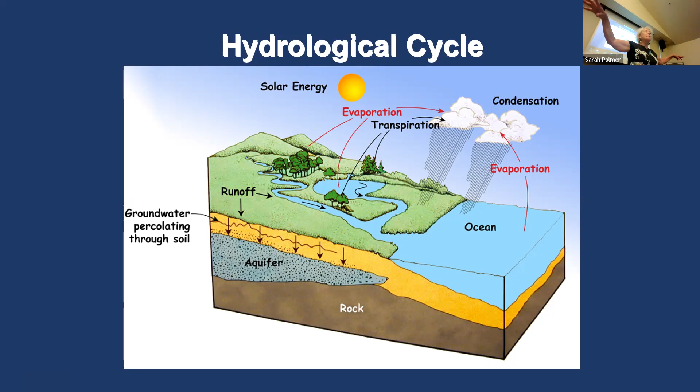An important thing to pay attention to is the aquifer, which is just a saturated part of the ground where water fills all the pore spaces. There are very few places in the world where it's one big basin - it's not an underground lake. There are some places in Florida and Mexico that's like that, but generally speaking, it's just saturated ground.

The infrastructure itself is old at this point. So what are some of our main challenges? We've got a number of challenges and risks, and one of the things you're going to find the most is climate change and unpredictable weather.

One speaker I heard, Hunter Lovins, called it climate weirding - we've got one extreme and the next extreme. With some of the models I've seen, the idea is that the far northwest is going to get wetter and wetter, the south and southwest is going to get drier and drier, and we here in the middle are going to be experiencing a little bit of both.

So sometimes a lot of wet and probably most of the time a lot of dry. I know that a lot of times we speak of ourselves as being in a drought. I think we have to change our thinking a little bit because we're not in a drought anymore, we're in a new reality. We are in a dry climate with occasional bits of wet. So that's just where we are.

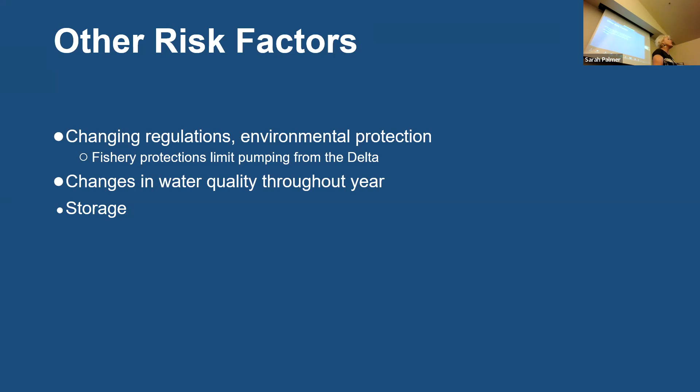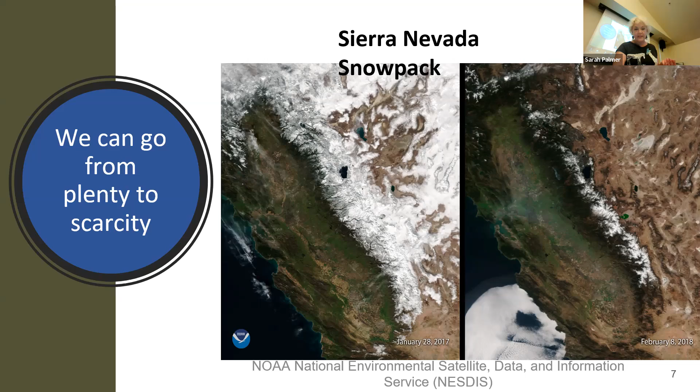And I was just up at Shasta on a water thing about a month ago. Shasta is right down where you can see some of the original structures they used to build the dam, so it's pretty shocking. And the boat ramp there, we had to walk down to get on this boat that was taking us on a tour of the dam.

It was a bunch of water people, and what happened was we had to walk way down this ramp. I looked up, and 140 feet above me was where we normally would have gotten on the boat. So you have this huge, what they call a bathtub ring around this thing.

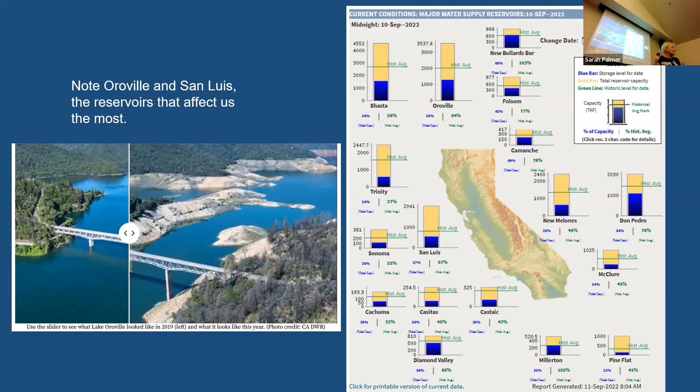I just put this up. This is available to anybody who wants to pull this up. They update it almost daily, and I pulled this up - this was from yesterday, midnight, September 10th. And these are the levels of the dams. The ones that most interest us would be Oroville and also San Luis Reservoir. You can see they're quite a bit below their historic averages.

Subsidence, obviously, the land is going to be coming down, and it is down in some places more than 30 feet from the levels that it used to be. And the reason is it's peat, and peat basically collapses.

And then we have sea level rise, which we're already seeing effects of, and then seismic risks, because some of these levees really, they're dirt filled. If you read a history of the Delta, what you sometimes see is that farmers were kind of saying, oh, well, you got a levee, watch my levee, it's bigger than your levee - this little thing where they were building these levees just to try and make sure they had the water and they could pump over. So seismic risk is a very real type of thing in terms of earthquakes. So all of this goes into the levees, which means the integrity of the delta is at risk altogether.

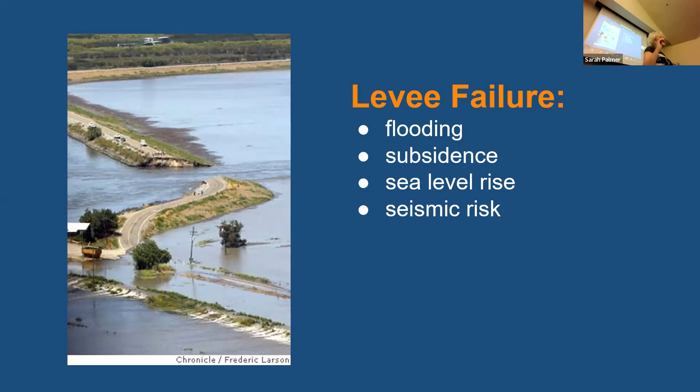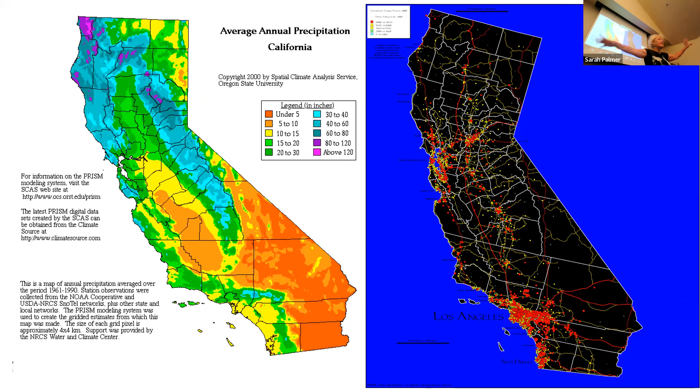Okay, so here's another thing, annual precipitation. This is kind of an older map, but it still shows the same picture - our annual precipitation, we get about 75% of our water falling in the north, and 75% or even more of our population is in the south. The red dots are population centers, and the bluish and purplish are where we get the most precipitation. Red is where you get the least - it's hotter, drier.

Okay, so we come up with a water portfolio. As you may be aware, we first had the WaterFix, which Jerry Brown said we had this WaterFix - we're going to put 2 tunnels through the delta, and we're gonna build this thing, and here's how we're going to manage the delta. And then Newsom came along and said, nope, we're not doing it that way. We're going to do a single tunnel, and we're going to have a water portfolio.

And a water portfolio means that you look at a lot of different types of things. When you're dealing with a water portfolio, one of the things which, thank goodness, because I'm on many committees in the state for various different projects, for diverse communities and disadvantaged communities and SB 200 - we can see we're going to keep this regional and basically try to maintain and diversify our water supplies. That's the thing, we have to diversify them. We have to have many, many, many different options. And that's hard for people to see sometimes.

And then we have to protect and enhance natural ecosystems while we're at it, if we at all can. Some things are going to suffer because it doesn't matter what we do. We will never get the delta back to where it was 100 years ago.

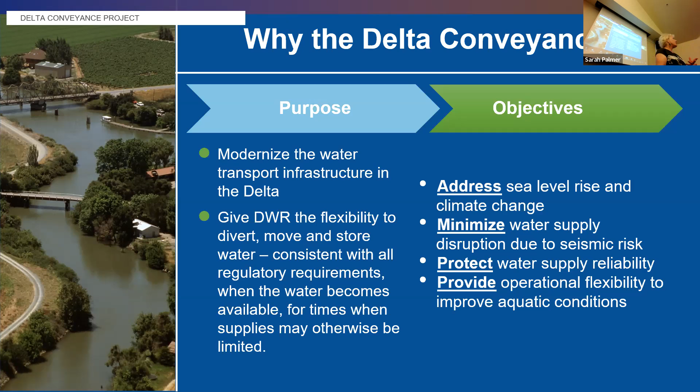And then it will also provide operational flexibility, so we'll be able to watch aquatic conditions in the Delta, and also be able to make sure that we can deliver water.

Then engineers came up with another idea. They said, why? Because we also heard from Discovery Bay, and they said, we don't want you building that thing there, that's going to be so disruptive to us. And so we said, okay, let's look at something else.

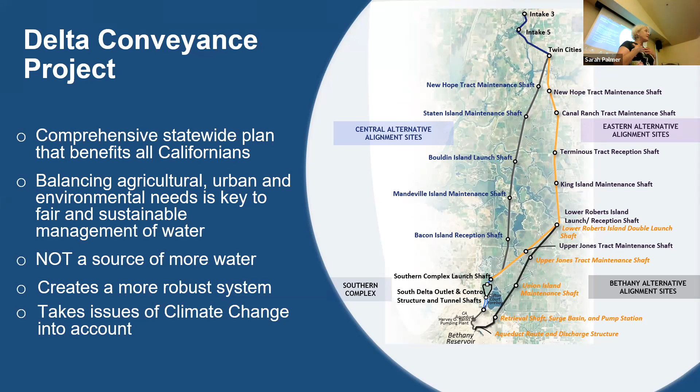But again, we're not the decision makers on this. Department of Water Resources is, okay?

So what is it? It is a single tunnel, not a double tunnel. It delivers water basically to State Water Project customers, and Zone 7 is a State Water Project customer. It delivers water in times of excess, and it helps provide water delivery flexibility.

It is not just a Southern California water grab, although yes, they're really quite excited about being able to get water when otherwise they wouldn't. I will not tell you otherwise.

It is not a change in the water rights. In other words, it has to be regulated within the current water rights.

And I had people say, oh, if you run this thing, it's going to drain the Sacramento River. No, it is not going to drain the Sacramento River. The Sacramento River will get the water it's supposed to get. Also remember, we have ocean-going vessels that go up to Port Stockton. We can't drain the Sacramento River, or those vessels won't be able to get to port.

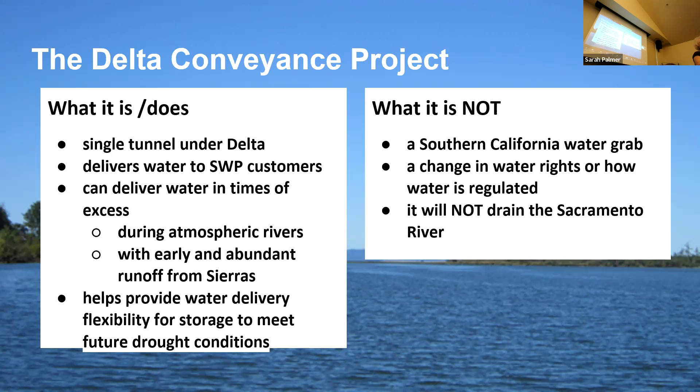So at any rate, that's just some of the issues about that one. Here is a link, www.deltaconveyanceproject.com. This is through Department of Water Resources, and you can get hold of it. It's a very long CEQA analysis, but you can also get into some of the executive summaries, or look at the impact report, which is a little bit shorter.

So the final decision will be with the Department of Water Resources, and it will not be made until the end of the CEQA process and listening to the EIR, which I believe is at the end of this year.

So another project, which actually ties into Los Vaqueros. You all know where Los Vaqueros is, right? Okay, they're doing an expansion project.

What they're doing is it will increase water supply reliability. Zone 7 has put in for about 10,000 acre feet of water through this expansion project, so we are involved with that particular thing. Angela Ramirez Holmes, one of our board members, is actually president of the board for this. And basically it will give more emergency water supply, especially if we were to have some seismic problems.

Basically, East Bay, Zone 7, and Contra Costa could all benefit from this, mainly through the interties between Bethany and this, and with other agencies as well. The quality of the water delivered to municipal and industrial water treatment facilities will be a bit better because this is, you can kind of consider it, a local storage system, since it's just up the hill.

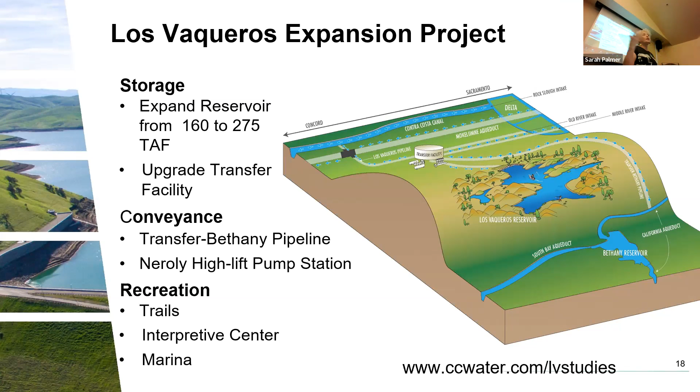Okay, it will have a conveyance, which is really quite good, running to Bethany Reservoir, a lift pump station, and then has trails, a marina, and an interpretive center, that type of thing. And this is all through Contra Costa Water.

Okay, then there's another one, Sites Reservoir. If you go up to Sacramento and then a bit west-northwest, you're running to Maxwell, which is the town near where this is. Interesting thing about this: the people of Maxwell really like this project, most of them, because it's kind of like one of those Western towns that's kind of failing a little bit, and this will provide help.

And this will give them some impetus. The people who own the property, and there's one woman who was a major landholder from this area, was very happy to see this happen. And so the Sites Reservoir, from its original conception, has been minimized somewhat.

But it will improve our water quality in the area. Zone 7 is putting in for about 10,000 acre feet that we would be able to have for regulatory use or banking with it. What it really does is give us new water, because it gives us an off-stream reservoir. It can gather water from the coastal ranges as it comes down. And it's something where we could release water from Sites Reservoir at times when you might want to retain some of the water in Oroville or Shasta in order to keep a cold pool for the fish.

So it would increase Northern California's water storage capacity by about 15%.

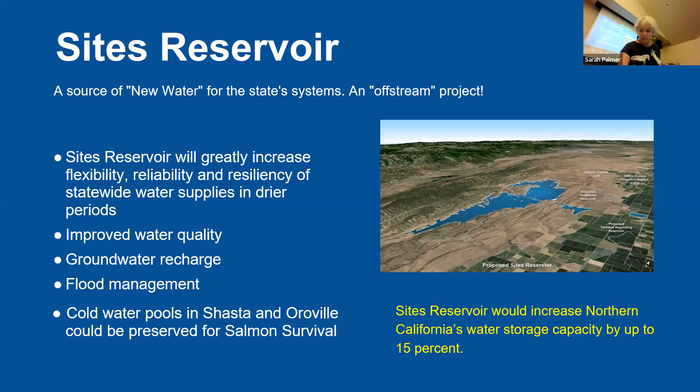Okay, now Zone 7. We store water outside of our valley. We store it in groundwater. This is just a little thing I pulled up to show you that groundwater can have different levels which can be separated from one another.

In other words, it's not just one big bath. If we look here, even in our own valley, we've got different aquifers at different levels separated by what some people call an aquitard. That means there are clay layers where the water doesn't really seep through from one level to the next. And so we have stored water down in Kern County, in Cowelo and Semitropic.

And also San Luis Reservoir. I wanted to put this up just to show you - San Luis Reservoir, full. See that island right there? That's this right here. That's what it looks like right now.

So do we have to get water to store? Yes, we do, or we are in deep trouble.

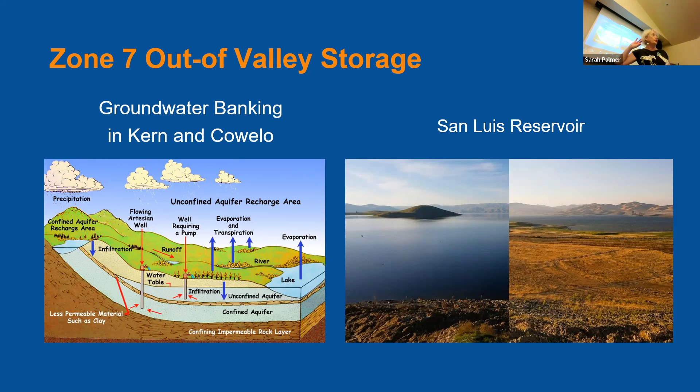So also we've got Lake Del Valle. Lake Del Valle is owned by the Department of Water Resources, so they maintain and regulate that, and then we can get water from that. And then in our own groundwater, we can store about 250,000 acre feet. We don't use all of it - we just keep a certain baseline going there.

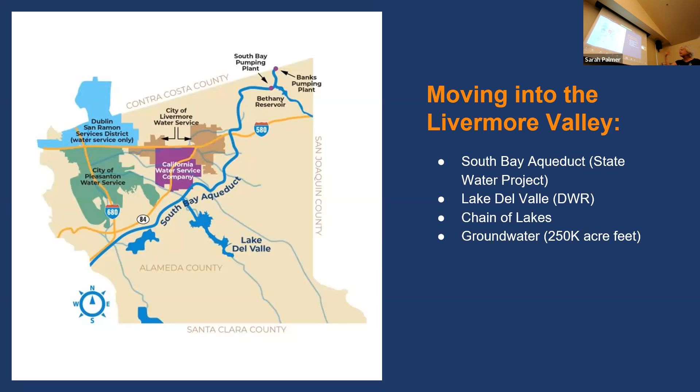And then the Chain of Lakes, which is developing - we own 2 of the Chain of Lakes now. I'll do this really quick, one of my last slides. You can see we've analyzed the Chain of Lakes. We're not going to get them until like 2035 or something - we were supposed to get them in 2014.

The miners of gravel decided they wanted to go deeper, and Alameda County, in their great wisdom, said 'oh sure, go right ahead.' Anyway, so as you can see, Lake I, which we own, and Cope Lake, which we own - Cope Lake is great for stormwater management.

Almost all of them are good for stormwater management, or at least basically some conveyance. Lake I, and hopefully when we get D, will be good for groundwater recharge. Others aren't, because if there's too much silt or too much clay, the water just won't percolate down from that lake. So it's just basically a conveyance at that point.

Any rate, so how do we get reliable water? Well, we can't do it with just one thing. We can't do it with just the delta, with just desal, with just basically potable reuse - we can't do it. All of these things are wonderful, and guess what - we're probably going to have to do them all.

I know you're looking at me thinking, how are we going to afford this? I don't know, but we're going to have to, because not having water is worse than not having trouble paying for stuff. We're going to have to pay for purification, delivery systems, and multiple systems, because there is no silver bullet. We need a Swiss Army knife with all the attachments, because that's truly the only way we're going to get through the next 50 years.

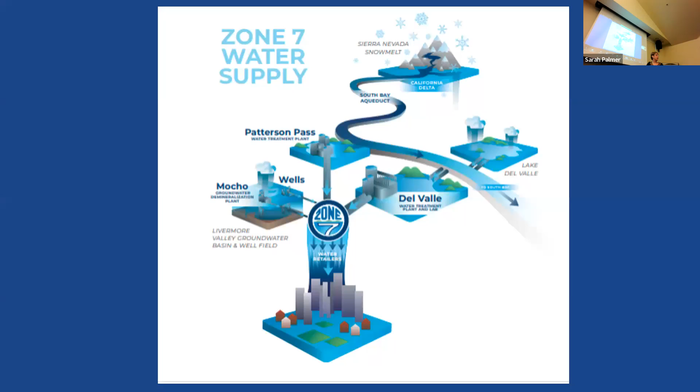We have surface water and groundwater treatment plants. The surface water treatment plants use water that comes from the State Water Project, at Patterson Pass and Del Valle. There's some standard treatment that goes on, but recently we've opened up an extra part of the plant which gives ozonation, a very good treatment for some of the stuff that's been coming our way lately.

For groundwater treatment, we have the Mocho demineralization plant, where we apply reverse osmosis. We also have two possible new plants being discussed. You may be familiar with some of the PFAS issues we have; I'll describe those for anyone not familiar. We have some contamination we're trying to address, so we're discussing building possible new plants for that.

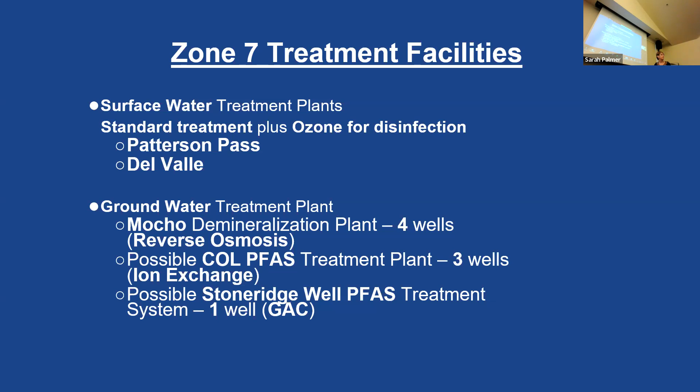At the Mocho plant, we apply reverse osmosis and then blend. Reverse osmosis cleans the water quite well, but I liken it to distilled water, kind of dead water, not much mineral content. So we don't use reverse osmosis for all of it; we blend it with some water that hasn't had reverse osmosis applied. With this blending, we're able to get well below required contaminant levels while keeping minerals in the water.

Your body expects a certain amount of minerals when you drink water, and if you don't get those minerals it can mess with your internal chemistry. So it's best to have something with some of the salty stuff in it. And then there's a little bit of chloramines that we add, just enough to keep it disinfected throughout the line until it gets to the end.

At the ozonation plants, we sometimes use chlorine, but really right now we're using ozone. And then we apply a little bit of ammonia to it, which creates chloramine. It's not a lot, and that helps protect it as it goes down the line.

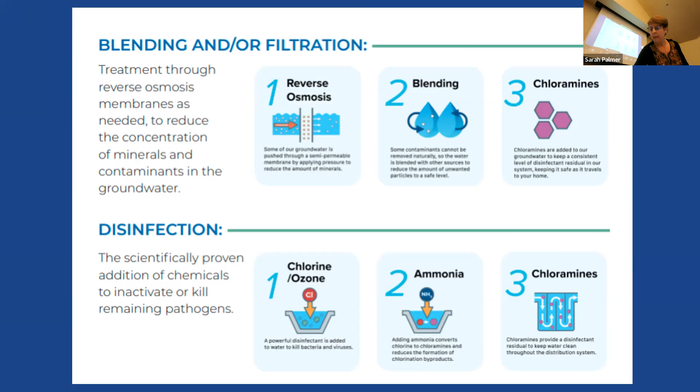So I'm trying to show you here how ozone works. Basically, you take oxygen and zap it, and it creates an O3 molecule. Typically you have 2 oxygens per molecule, and this gives you 3 oxygens. This tends to seek out some of the things that we don't like and destroys it. And what's really nice is then it takes it down to some of its basic parts, so you don't have a lot of waste that you have to deal with.

These are some of the things that it attacks: bacteria, viruses, some of the algal byproducts like Sarah was talking about, and some chemicals—not all chemicals, but there are some important chemicals that it attacks.

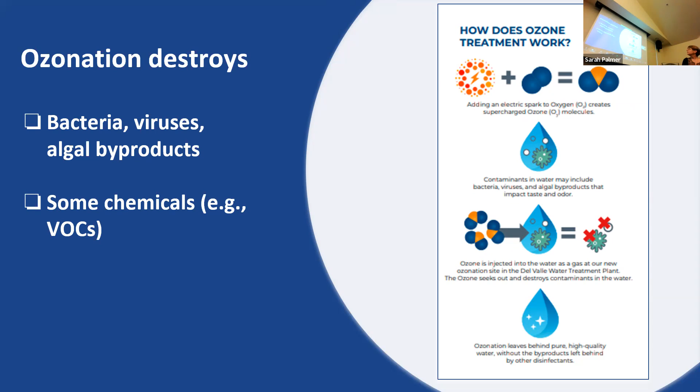After the treatments, it goes into our system. You can see the transmission system here. That's the surface water—see the Mocho wells there? That's where the treatment plant is for the groundwater. Plus we have some other wells, and those go into the system here.

One of the first things I asked when I came to Zone 7 is, I'd really like to know where a drop of water starts and how it works its way to my tap. Everybody laughed at me, quite appropriately so—it's really hard to track water here because there's so many things going on at so many different times. You have groundwater, you have surface water, they come in at different times for different reasons. You have some wells that are turned off, you have a plant that's turned off for cleaning or maintenance. So you continually have stuff coming in and out of the system, and it's really hard to say where your water comes from. You just know it comes from the system and these particular components of it.

So we have the Chain of Lakes wells there, we have the Stoneridge well. See that little cluster there is Mocho wells, and then you've got the Hopyard wells there. This is just Zone 7.

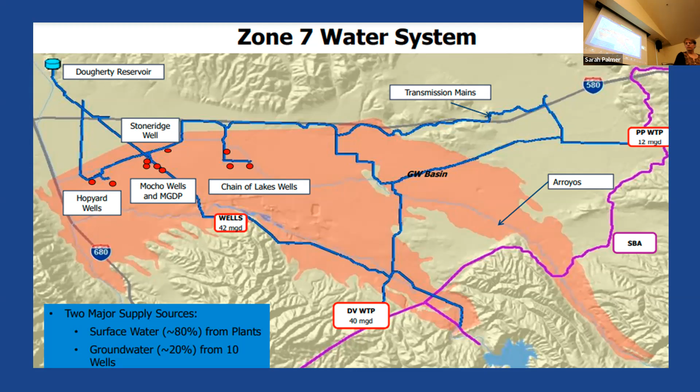That would be good, yes, thank you. Thank you.

So there's a certain amount of testing that we have to do to understand what's in the water, and then we test for a variety of things: microbes, organics, inorganics, nutrients. There's a lead and copper rule that comes from the state, and PFAS, which again I'll drill down on a little bit more—that's actually an umbrella term for a group of chemicals that we have concerns over. And the standards that we apply for the testing—the primary testing standards have to do with health and safety that come from the state mostly.

Secondary, which I think comes from the DDW, the Division of Drinking Water, is taste and smell. So these don't really affect your health and safety, but it affects your enjoyment of the water.

So we do test for those things as well. This is the annual report—I kind of grabbed a few things from our annual consumer confidence report, so you can see a lot of the testing that we do. This is a bunch of stuff we tested for that we don't have. This is stuff that we test for and make sure it's below acceptable levels. Here's some lead and copper testing, some PFAS stuff.

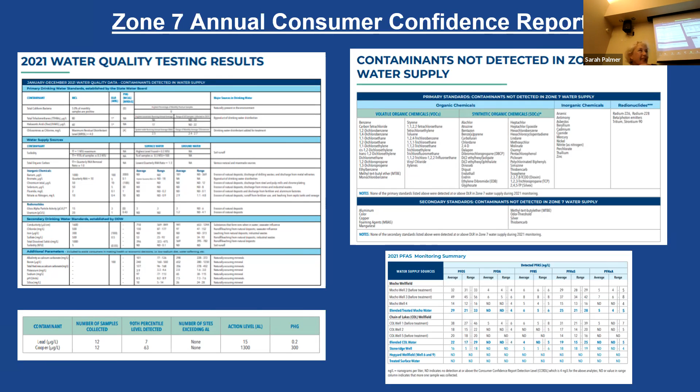So I'm just trying to remind people about various sources of water contamination that we're having to deal with. There's a whole variety, and we may not have all of these in our area, but we have a lot of them. And so you see how these are.

We do have an upper and lower aquifer, more or less, in our area. I'm oversimplifying it. And east to west, you can kind of divide them a bit beyond their characteristics, but generally our water flows from east to west. And generally, although we do have confining layers of clay, they are not perfect, and there is some communication between layers at certain points. So it can communicate within itself. May take a while, but that matters.

So you can have things like the LUFT, leaky underground fuel tank. You guys may remember a couple decades ago it was a big effort to clean a lot of gas stations. It's still ongoing, but I think the regulations require it a little less now. But that's something we have to look for.

Septic tanks, a lot of nitrogen in the water, or nitrates in the water. Sewers, you can have leaks and stuff from there. You have landfills. Old landfills are not lined, and so you can have leaks from landfills.

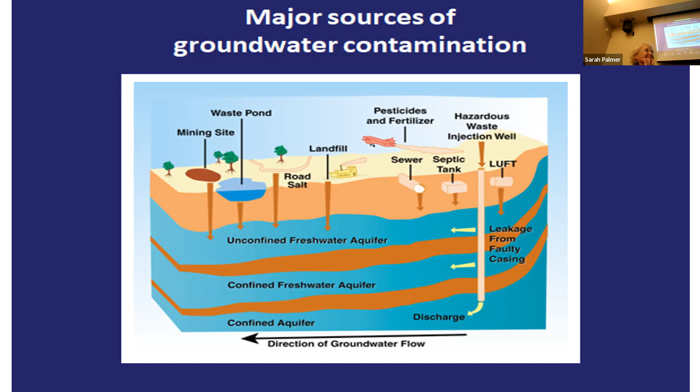Oh, sorry. Sorry. Oh, I guess I'll look here.

And so if you take a look at this tree, see the PFOA and PFOS? Those are the main ones that have been around for part of the century. Maybe not in our area, but in existence. And at some point they realized that these were kind of problematic, and so they created other products that are supposed to be less harmful. So basically, what these are is a chain of carbon and fluorine bonds, and it has really interesting molecules on the end. I'm on the edge of my chemical understanding.

But what the heads and tails do is repel water and repel grease or oil, which is why these are such cool products. So when you see PFOA, think of Teflon -- nothing sticks on your pan, right? PFOS, think of Scotchgard -- you spray it on something and water and grease are repelled. They're really cool products, they do all sorts of cool things, but unfortunately not good to drink.

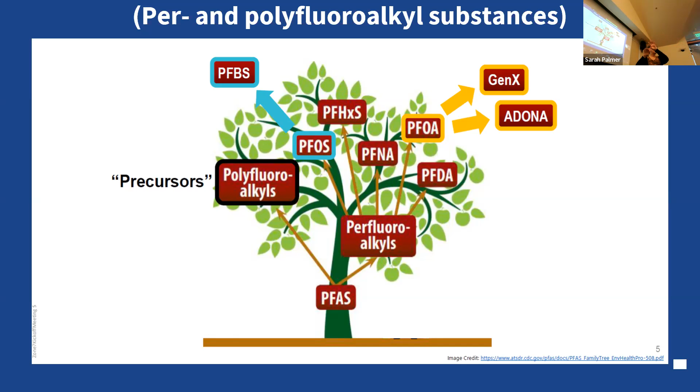So there's a fast follower -- you see the PFHxS. The PFOA and PFOS have been around for a while, and they've been tracking really slowly through regulation. But we kind of see what's going on -- the states have picked it up, the EPA has been slow. Now we see PFHxS coming in, and it's tracking fast, but like these other two we're looking to have to deal with that too. We do have some bad in some of our wells.

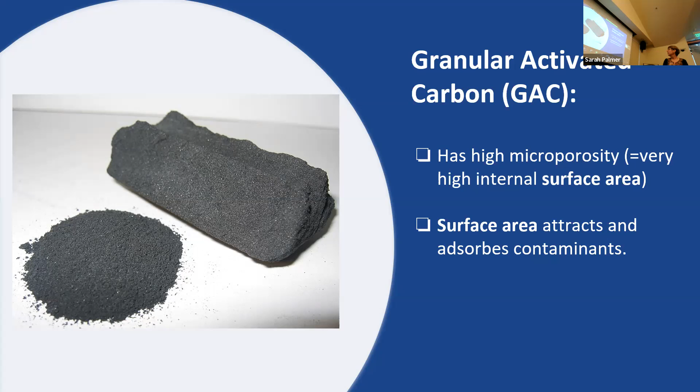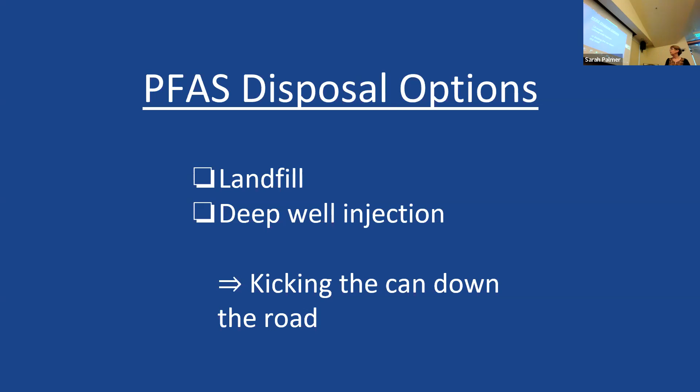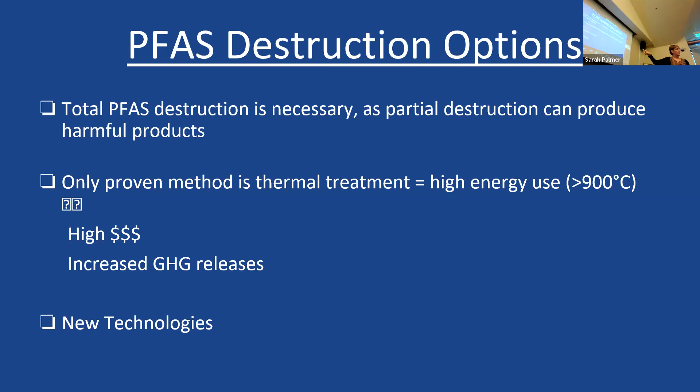There are some new technologies people are working on. All right, this is hot off the press—just like a week or so ago. Northwestern University, some graduate students, were working on this.

They were told, 'I don't think this is going to work, but give this a try'—a relatively simple procedure. They said okay, we'll go do this, and it seemed to kind of work, then COVID hit, so only recently did they get back in the lab to tell us about it. There's a bit of a delay there. It turns out—and this was for a particular PFAS, so you may have to design it for different PFAS—these particular substances, which are pretty easy to make, help destroy it. It's funny, because these are 'forever chemicals,' really tough to destroy—sunlight doesn't seem to destroy them at all. But remember I told you about the heads on the end? For some reason, this attacks those, and once you've disabled those, it unzips.

Again, I'm on the edge of my chemical knowledge, so you'd have to have a chemist explain that more to you. Carboxyl groups - it's a carboxyl group. Some of the enzymes, a lot of PFAS have carboxyl groups, so that's what they're hitting.

So early days, just hot off the press. I'm waiting for somebody else to repeat this. But this is really promising, because it's probably not something you can do in situ, like in a well - you couldn't do it in place. But once you've got the stuff through treatment, you still got to do something with it, and this may be better than just disposing of it and forgetting about it. So this is really hopeful - we were happy to see this. Fingers crossed that progresses.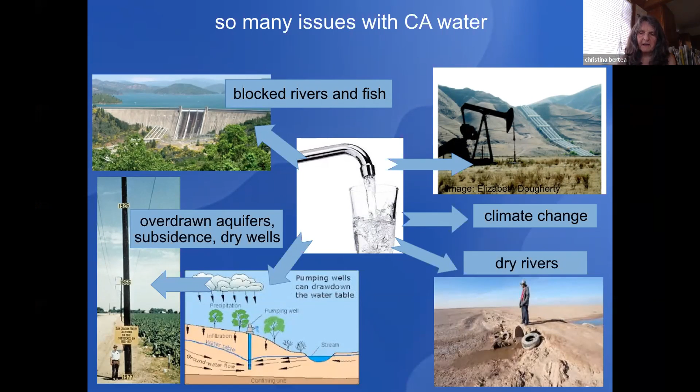Okay, so we've just been hearing about so many water issues in California. We're just going to dive into what we can actually do to help there be enough water for everyone. The issue is making sure there's enough water to go around, including for fish and rivers and ecosystems. So let's just pretend that water has consciousness. Then what can we do to demonstrate our love and appreciation for it in our own daily behavior? That's what we're going to be looking at.

We're going to start with the low-hanging fruit, the trusty bucket. In your shower, you can catch that cold water before it heats up. You can keep the bucket there, in case some of the water comes out of the tub spout.

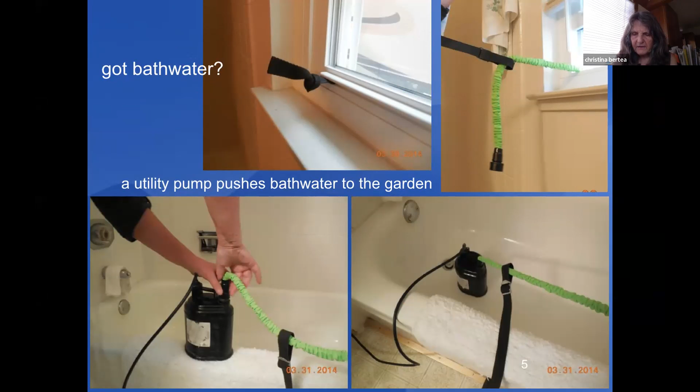I don't know how many of you know what your shower head rating is, the gallons per minute flow, but Niagara Conservation makes really excellent ones with as low as 1.25 gallons per minute. That's the one I have, and I don't feel the least bit deprived. When I'm taking my shower, I feel quite luxurious, knowing also that it's going out to my gray water, to my elderberry tree.

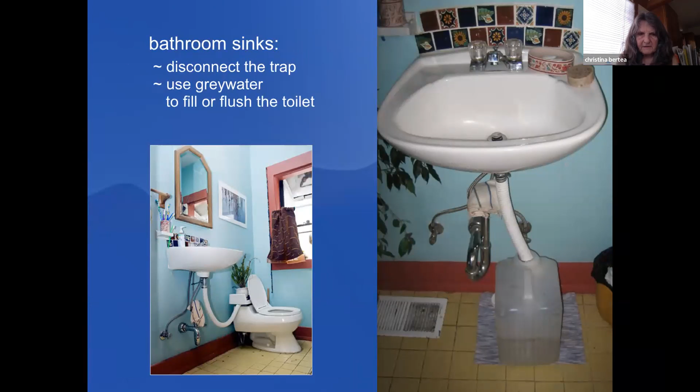Your bathroom sinks, you can disconnect your trap and collect that water and use it to flush the toilet or use it outside. In this other image on the left, they're actually filling their tank with the water from their sink. It's good to check and see how much water your toilet is using.

The state mandate is 1.28 gallons or less, but there are toilets out there that only use 1 gallon. Some of them actually use less than that, like 0.8 of a gallon. So you could consider getting a lower flush toilet.

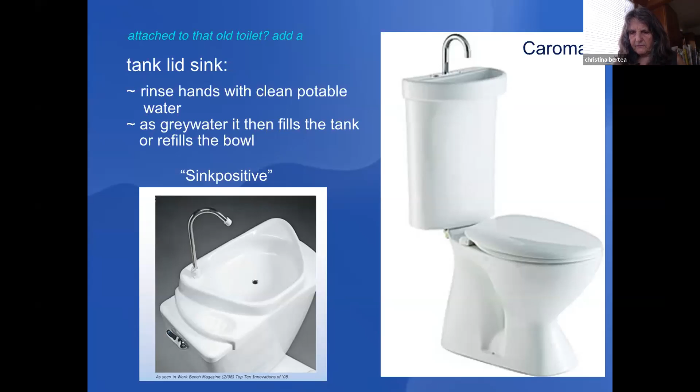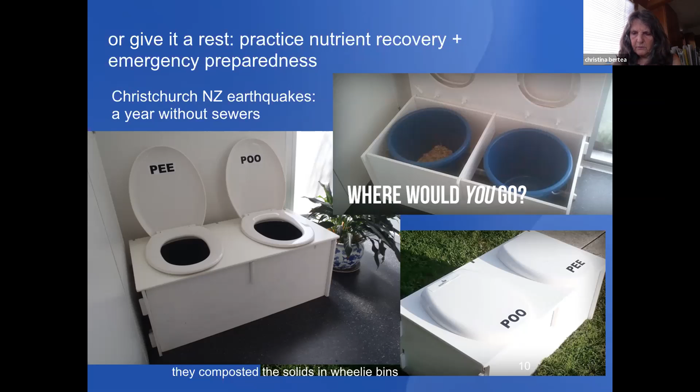Or you can even just give your toilet a rest and practice nutrient recovery and emergency preparedness, because we've been talking about the possible impacts of earthquakes. In Christchurch, New Zealand, they actually had severe earthquakes that put their sewer out of commission for a year, and people had to figure out other systems. The 2-bucket system was the preferred system, and they learned to compost the solids in wheelie bins safely. So you could explore this yourself. There's instructions online about how to actually process your own effluent and do it safely.

Our urine is sterile, and it's an excellent fertilizer. The Rich Earth Institute in Vermont is really exploring how to use it for agriculture, collecting urine from people, and doing a lot of research about how we can restore ourselves into the nutrient cycle. Because urine is such an excellent fertilizer, the nutrients tend to go right through the sewage treatment plant out into our waterways and cause algal blooms. We need what came from the earth that we ate to go back to the earth when we're finished with it, not into water.

So I've been working for many years with Greywater Action. Using water twice is nice, especially water from your tub, your shower, your sink, and your laundry. It's water that's really barely used, and it's perfectly safe for plants if you use the proper products.

It's good to have this chart, which gives you an idea of average personal water use per day. You can see that if you send your washing machine water and your shower water out to the garden,

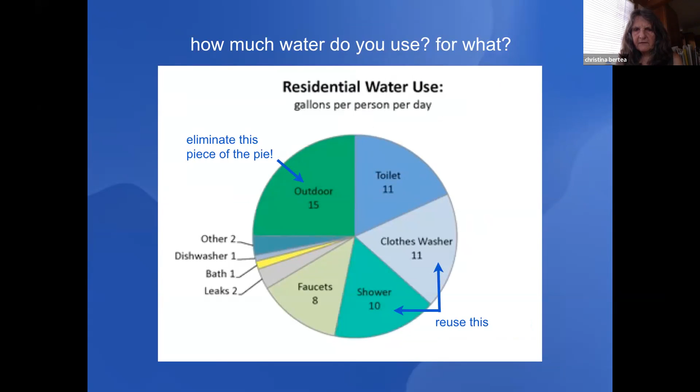you could eliminate about a quarter of your municipal water use by using that for irrigation. There are definitely ground rules spelled out in the code, because we do have a Greywater code in California. The concerns are that people and animals not come in contact with the greywater, and you don't want to be spraying it, so you don't want people inhaling it.

You don't want it surfacing or daylighting, and certainly not running off. Where it comes out into the garden needs to be covered with 2 inches of either mulch, gravel, soil, or a solid shield. The really important one to remember is that you don't store greywater for more than 24 hours, because it becomes, well, I would use the word skanky.

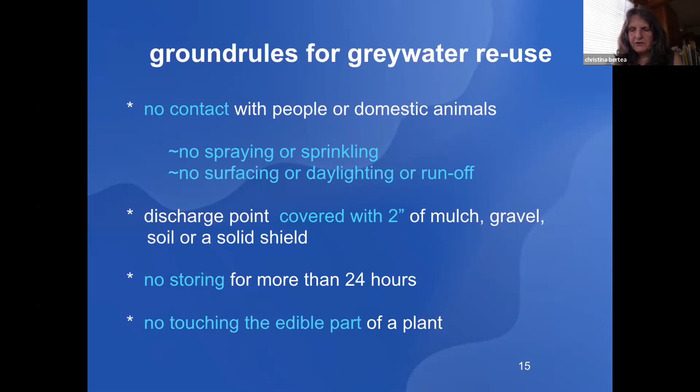The bacteria that are in it would breed, and it becomes very unpleasant to deal with. The code does allow using greywater for growing edibles, but you can't grow plants where the edible part will be touching the actual greywatered soil. So therefore, no root vegetables.

There's a valve or some kind of way to divert the greywater either to the garden or back to the sewer or septic. It's really critical, because there would be times when you wouldn't want it going to the garden, like if you're washing diapers or some kind of toxic chemicals. And that valve needs to be labeled clearly.

There needs to be a maintenance manual that stays with the house. Greywater may be distributed in mulch basins, which we'll talk about. And of course, you wouldn't want to put toxins down the drain into your greywater because that would harm your soil. So product choice becomes really important, which is great, because if it's not good for your soil, it's probably not good for you either.

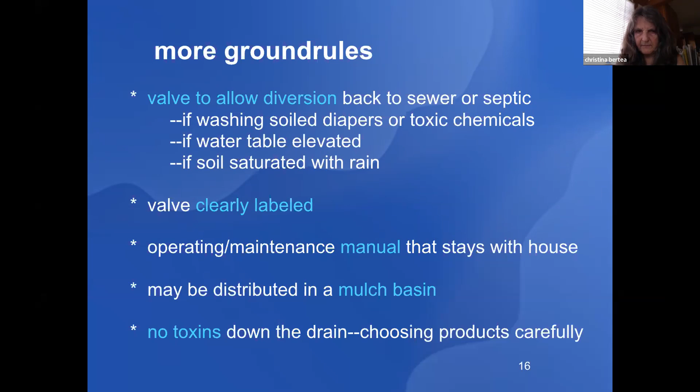So mulch basins are basically just a trench or trough with very coarse wood chips or organic material in them. The idea being that there's lots of air spaces so that when the greywater goes into it, it spreads out and soaks in. It doesn't come up to the surface or pond or run off.

Obviously these are kind of clunky items in the landscape, so this is best for trees and shrubs and larger plants rather than lawns and small plants like ground covers or flower gardens.

The greywater enters a mulch basin through a mulch shield, which serves many purposes. It marks the location of the outlet. It prevents roots from growing up into the tubing or pipe because there's an airspace. The greywater free falls through air down onto the mulch — that's the critical role of that mulch shield. And then it spreads out through that mulch and soaks in.

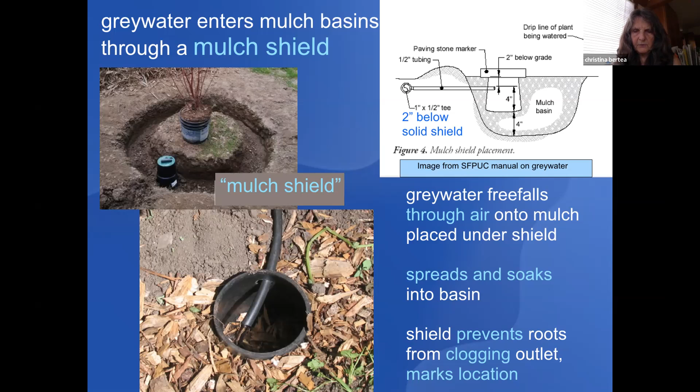So if you happen to have a washing machine outside, this is really a brilliant system. You just have a pipe going to each one of your fruit trees or trees that you want to irrigate, and you just move your washing machine drain hose from one pipe to another.

Or if you're inside, you could have a dual outlet washing machine box and just move your drain hose either to the garden or to the regular sewer or septic.

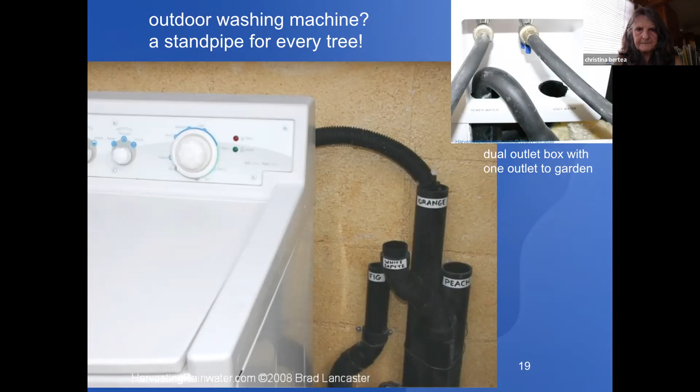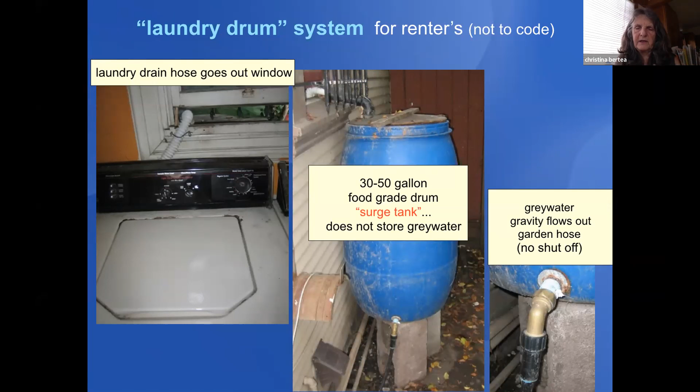If you're a renter, you could see if there's a window near your washing machine and stick the drain hose out the window and have it feed into a surge tank. Remember, we don't store greywater, so it's a surge tank because the water immediately starts draining out since there's no valve going out to the garden through a hose. The surge tank basically is just a space for that, if the machine is pumping really fast, for that water to land and then more slowly drain out to the garden.

The most accessible greywater system is the laundry-to-landscape system. You can pretty much get the materials for between $200 and $300, and it's very easy to do yourself. This has been really highly popular since the code changed and made greywater accessible to people.

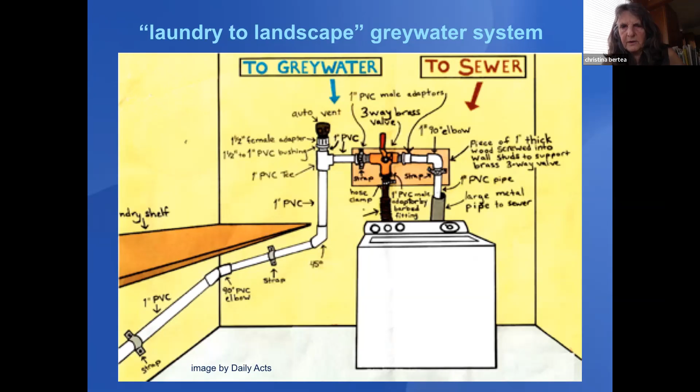You can see that there's a diverter valve there that the washing machine drain hose is attaching to, and one side of the diverter valve goes right back to where the drain hose was going before, and the other side goes out to the garden. This was the San Francisco PUC's manual with instructions, and you can see the tubing leading to the mulch shield that we just talked about in a mulch basin. That's how the greywater gets distributed in the garden.

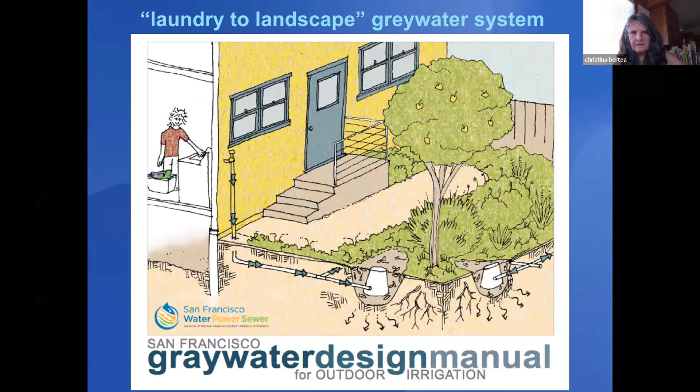The reason this particular system, laundry to landscape, does not require a permit as long as you follow the guidelines is that you're not actually altering any of the plumbing. All you're doing is connecting that washing machine drain hose to the valve and giving the valve the option of sending it back to the sewer or out to the garden.

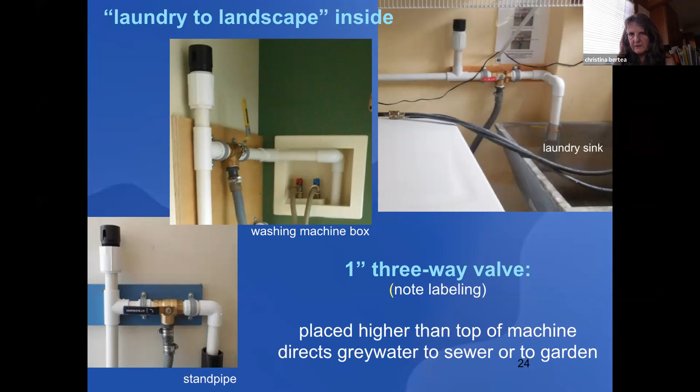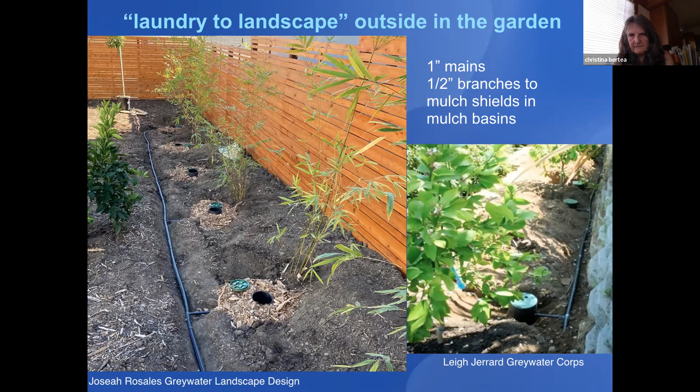What's great about that washing machine system is that there's already a pump in the washing machine that helps push the water out. If you want to use gray water from your showers or sinks, it has to get there by some other means, ideally by gravity. There's something called a branch drain gravity system, which has its limits—in some cases your garden will be uphill, or your foundation will be too high, or whatever.

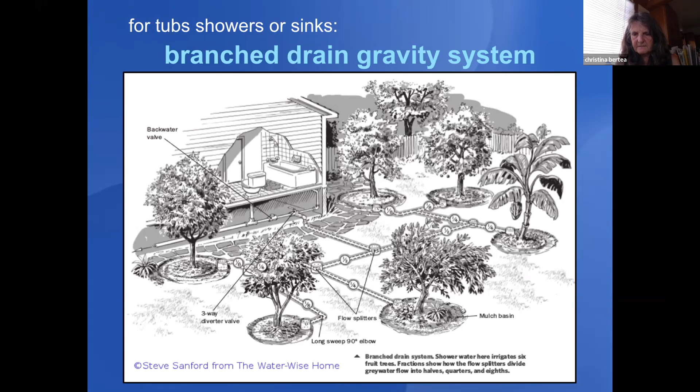But it's very elegant when it's possible to install. Basically, gravity just brings the gray water out, and it divides with double L's—that's how it splits, just flowing along by gravity. Here's a clear image of it: the diverter valve sends the gray water out into those double L's, and you have a whole sequence of them dividing it into more and more places where it can go into the mulch shields and mulch basins. It's a very elegant, very simple system. Once it's installed, it just hums along all by itself.

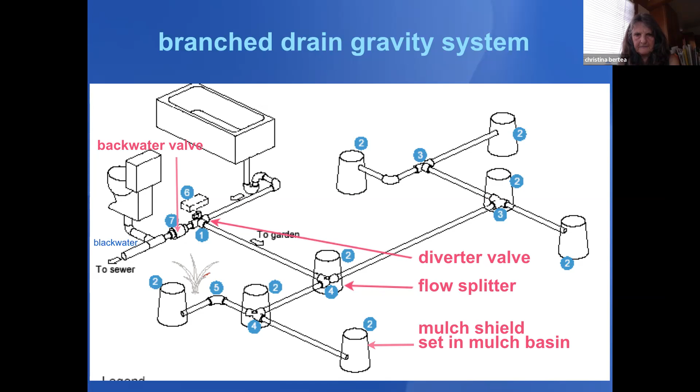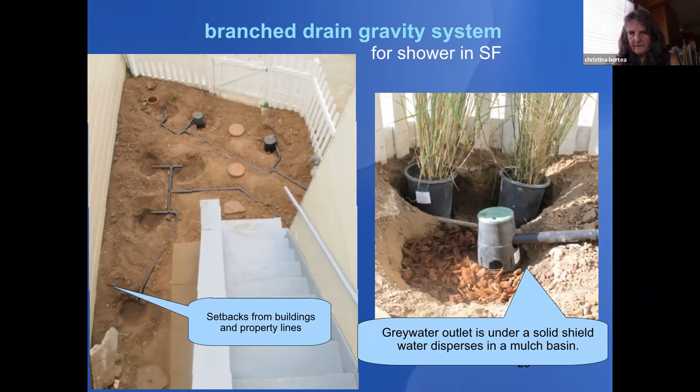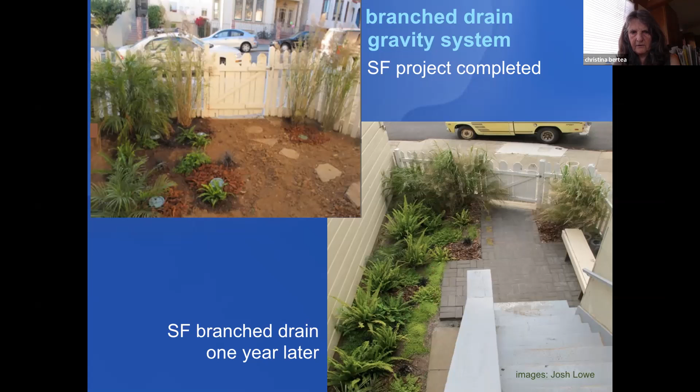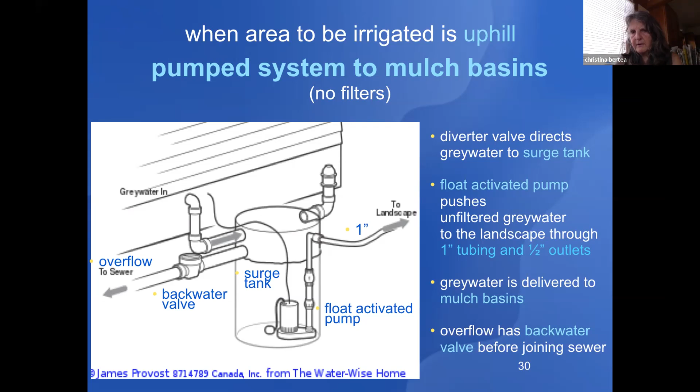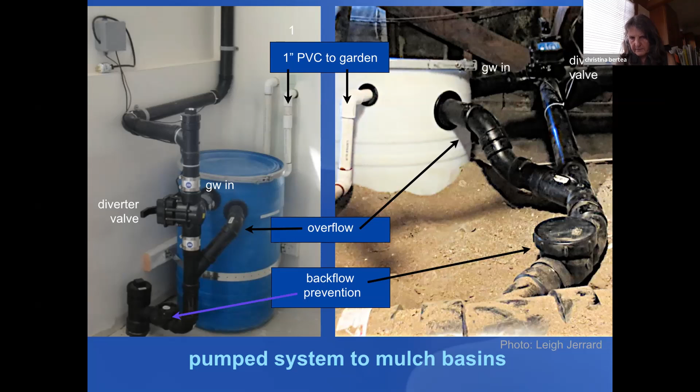This is what it might look like: on the left, it's in a basement, and on the right, the surge tank has been dug into the crawl space. The 1-inch PVC pipe carries the pumped gray water out to the garden into 1-inch tubing.

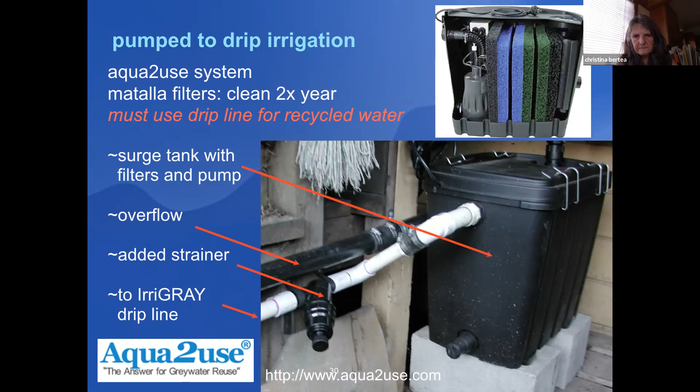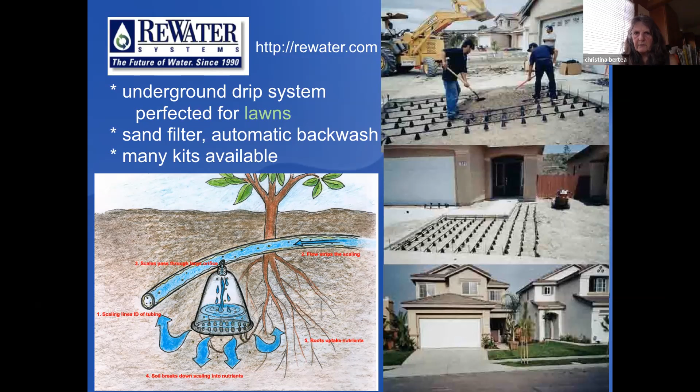There's a company that's been around for many years who have perfected using gray water for lawns, which is quite a specialized thing. They're based in LA and they do sell kits. They're pretty elaborate systems because there are filters and automatic back washing, so they tend to be more expensive, but if you're really attached to your lawn and producing a lot of gray water, that's a great way to use it.

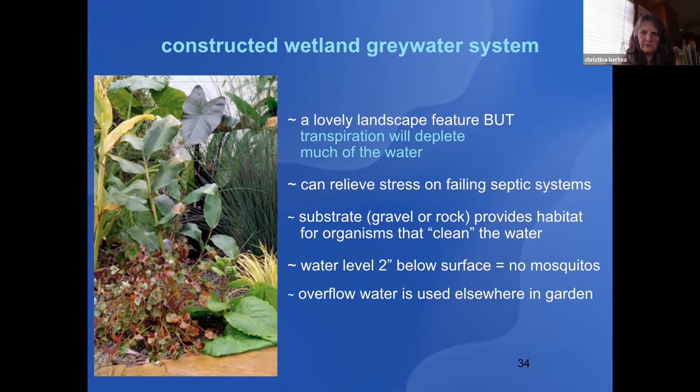If you don't really need your gray water for irrigation, but don't want it going into your septic system or the sewage treatment plant, it's pretty wonderful to create a constructed wetland, because you can have water-consuming, beautiful tropical plants that eat up the water and transpire it. The plants grow in a gravel or rock substrate that the gray water passes through, and the water level is kept 2 inches below the surface, so there's no mosquitoes growing. There's an overflow to be used elsewhere in the garden, but it can create a really beautiful landscape feature if you don't need the water for irrigation elsewhere.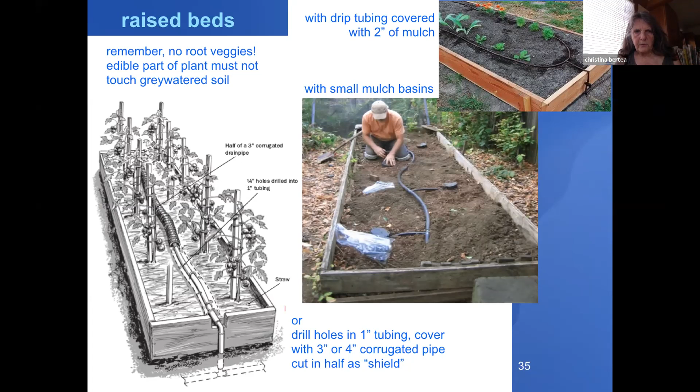People always want to know about raised beds. There's many ways to use gray water in raised beds. In the upper right-hand corner, they're using drip irrigation. In the middle, they're using little mulch basins with mulch shields. On the left, they've punched holes in a 1-inch tubing or PVC, and you can cut a 4-inch corrugated drain pipe to act as a mulch shield over it and protect the plants from coming into contact with it. So there are definitely ways to do raised beds with gray water.

This is one of the most important initiatives we're working on in the state of California, and in the country right now, trying to get into the code, that whenever there's a large remodel or new residential construction, gray water ready plumbing be installed, meaning the gray water pipes be directed so they're easily connected to if and when a person wants to install a gray water system. This is really essential, and it's going through the process of hopefully getting into the code in a couple of years, but a local jurisdiction could easily adopt rules requiring it now, which makes sense, because if plumbing is conventionally installed, it can be very expensive and difficult to capture that gray water later on.

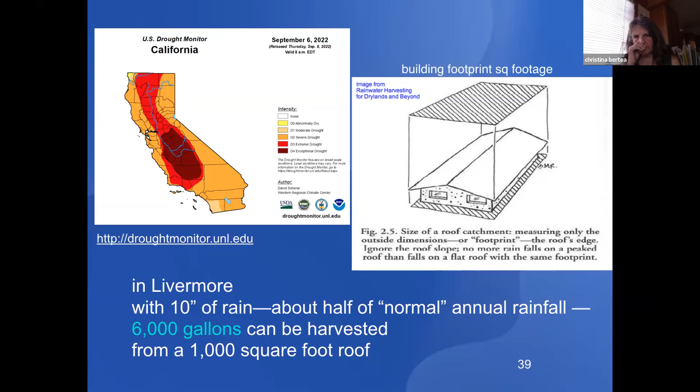I'm just so tired of hearing, oh, it doesn't rain anymore. We really need to appreciate the rain we are getting and be grateful for it, because even though we're in a drought, which may actually be more like the new normal, in Livermore, 10 inches of rain would be about half of your normal annual rainfall. With 10 inches of rain and a 1,000 square foot roof, which isn't that large, you could capture 6,000 gallons. That's significant, even with a quarter of your normal annual rainfall, you could capture 3,000 gallons.

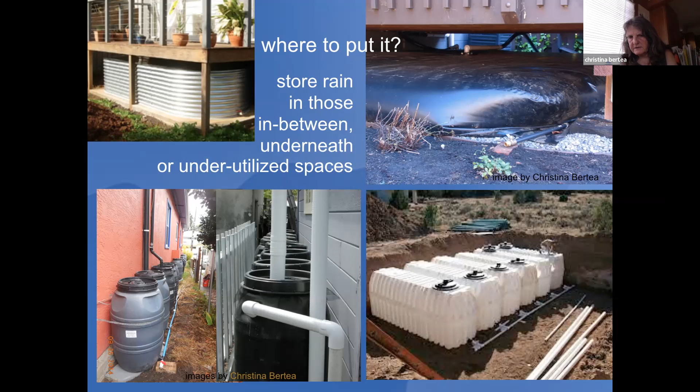The issue is where to put it. That's the real issue. So you could think about what are those underutilized or underneath spaces where you could put storage. In the upper right-hand corner, there's a pillow tank, custom designed to go under a deck, a very large deck, that held 2,000 gallons in a very quiet and unobtrusive way. There's oftentimes spaces between buildings and fences that aren't really used, and you can line up barrels there, or you could just bury your water storage under the ground.

It's important for people to know that there is such a thing as a wet system. A wet system uses physics to get the rainwater from the roof to the tank—there's no pump involved. It's just like the P-traps under your fixtures in your house, under your sinks. Water goes down and comes right back up again because water seeks its own level.

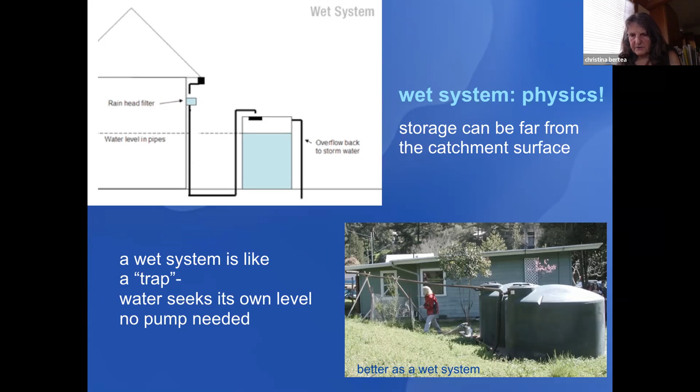If they're constructed properly, the water will just go down and then come right back up into the tank. You can see this image in the lower right-hand corner—a pretty funky looking system that could easily have been a wet system and looked much less jerry-rigged.

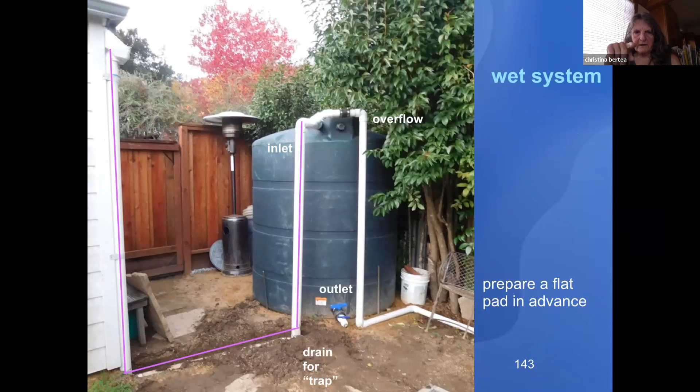Here's one just demonstrating how it can work. This person didn't want anything obstructing the overhead, so he didn't want a pipe going from the garage over to the tank. So it just went down and came right back up again, right into the tank, no pump.

This one is going to tanks that are quite a bit further away, but works flawlessly. It's often good to put a drain on the trap part of it so that that water doesn't sit there all summer long when it's not raining.

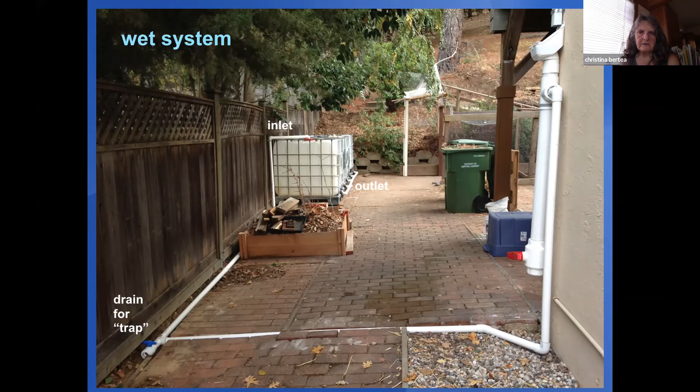This is a really excellent sort of map of all the parts of a rainwater system. You've got your catchment surface, typically a roof. You've got a gutter and a downspout. You can put various methods of cleaning the water before it goes into the tank, like a leaf eater or a first flush, which diverts stuff and diverts the dirtiest rinse water.

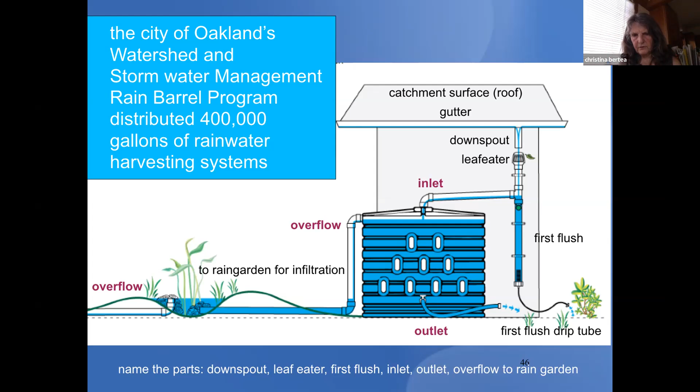And then it goes into usually the top of the tank. It comes out at the bottom in an outlet, and it always needs to have an overflow. What's great about this drawing is that it has the overflow water going to a rain garden where that water is again captured, and in this case, infiltrated into the soil. Even the rain garden has an overflow. I really appreciate this drawing.

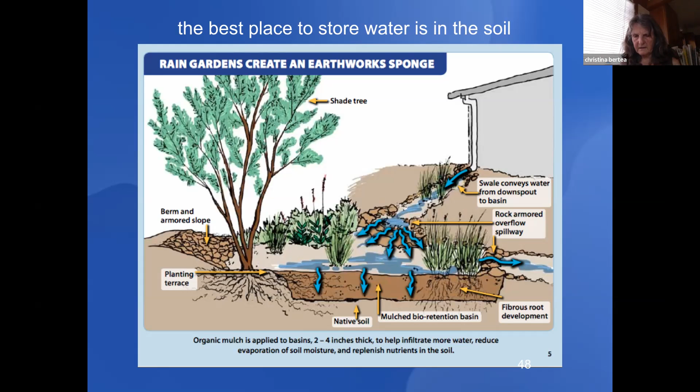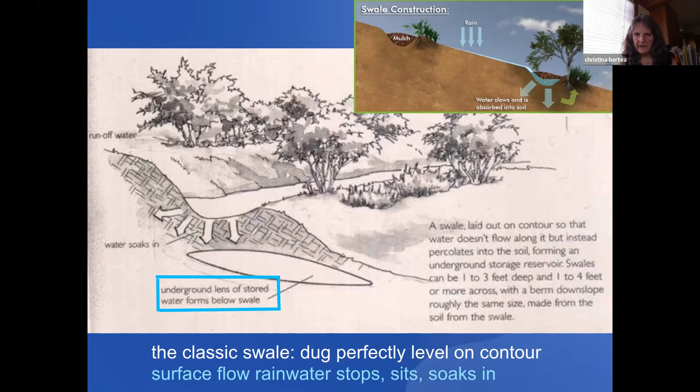If you happen to have property with more space, then you can dig what's considered a classic swale, which is a trench basically perfectly level on contour. Any water flowing across the surface from uphill will stop in that trench and sit there and soak in. This is how you can basically rehydrate a complete hillside, because the water creates an underground lens of stored water that then migrates underground downhill, in the process basically creating hydration for the entire landscape.

Some people are really asking this question: can we rehydrate California? With methods that don't involve giant infrastructure projects that cost billions of dollars and many, many years, but things that can be really done on the ground, small and local. They anticipate that if we could accomplish that, we could reduce wildfires, raise the water table, lengthen the green growing season, moderate air temperatures, and restore biodiversity. All very, very desirable outcomes.

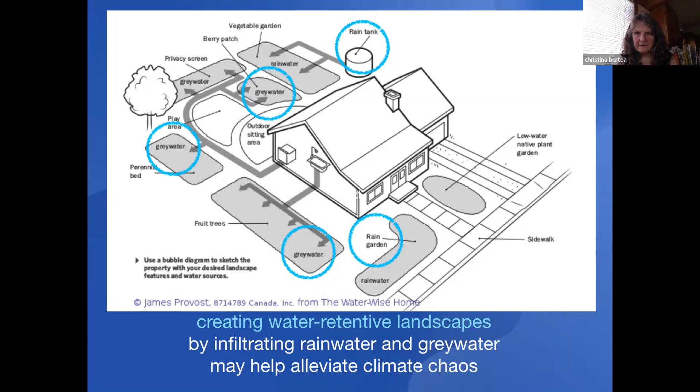So in thinking about your own property, how can you create a water retentive landscape? By infiltrating rainwater wherever you can after it overflows from your storage, and spreading out your greywater from each fixture to a different part of your garden. Just rehydrating your landscape can help alleviate climate chaos—a big claim, but that's a whole other conversation. What we're understanding is that to calm the climate, we need to restore small water cycles, so that we have more local rain that soaks into the ground, and so that we have plants growing 24/7, round the clock, constantly transpiring.

And the reason that it's important to have plants 24/7 is that they are feeding the microbes in the soil, which are the ones who sequester carbon from the atmosphere in pretty permanent forms. So it's the roots from plants exuding carbohydrates that they exchange with microbes, and then the microbes create humus, which helps store more water in the soil and hold nutrients and makes the whole system more resilient.

So the key is having a hydrated landscape. So you want to keep all your rainwater on your property and capture the surface flow and reuse your greywater. That's the formula.

Because if you have plants, they're transpiring and they're keeping the climate cooler. If you have bare soil, all that heat that's hitting the ground is going right back up into the atmosphere, increasing the temperature.

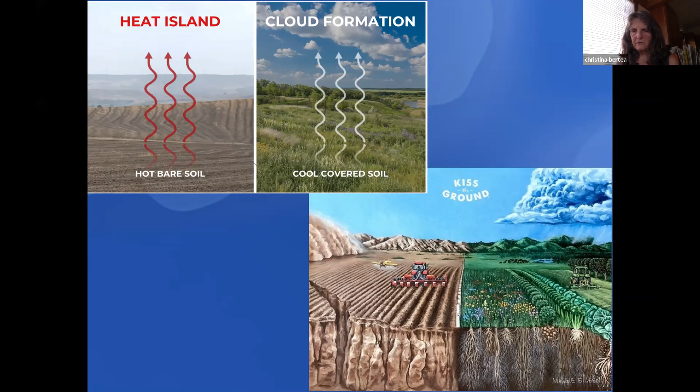Because when it's bare, it's just putting that heat up. And also carbon is burning off from the soil. So you get the plants back on it, and the plants are working with the microbes and bringing that carbon back out of the atmosphere.

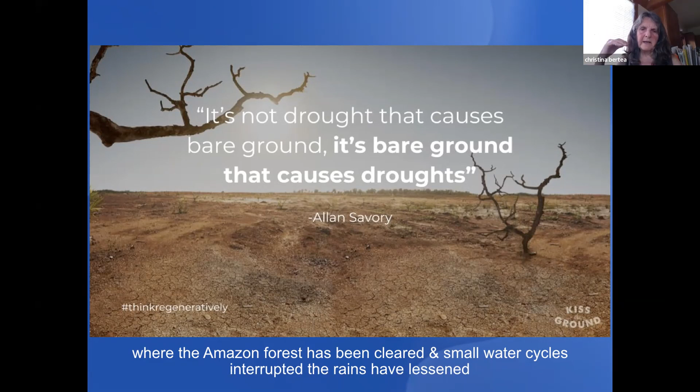So keep the carbon in your soil. Plant perennials so they're growing year round. Or use ground cover and mulch to protect the soil so it's not getting hot and the carbon's not burning off. And avoid tillage. Reducing tillage is really key.

What we're understanding now is that two-thirds of the carbon that used to be in the soil is now in the atmosphere because of our industrial agriculture practices. And our challenge now is bringing that carbon back out of the atmosphere into the soil with all kinds of benefits associated with it.

Dig a swale to infiltrate some water. Build some humus in your soil by helping your plants feed microbes. Plant a food forest so that there's more cover of the soil and shade protection.

And just educate yourself about the relationship between soil and carbon and water, because they are all totally interlinked. And if we can get it right, we can really heal things. And just remember and honor water.